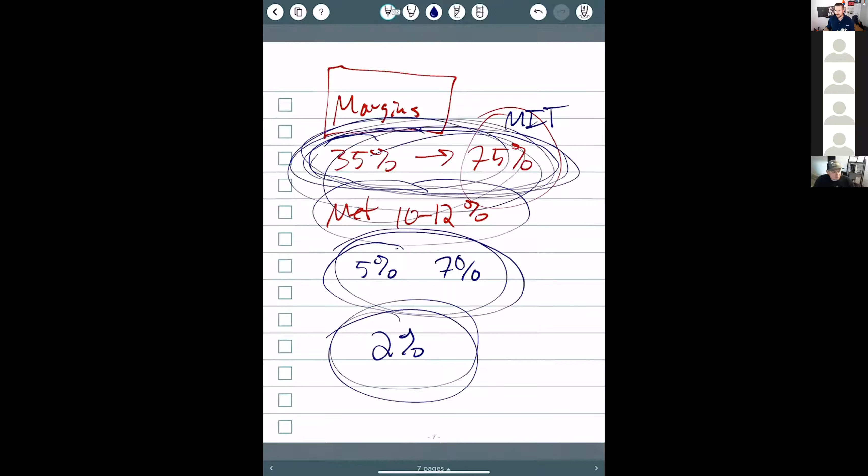Questions so far? If there's questions, raise your hands or put it in the chat. We're not there yet, I'm back up here.

So what I want you to get from this is this: Xactimate is not a sales tool. It's an estimating tool. We use Xactimate to estimate, quantify, and qualify the losses and the jobs we either just did or are about to do. It's not a sales tool, it's not a guarantee of anything. We just use it because that's what is commonly accepted and common practice in our industry. You absolutely can work in restoration and not know a thing about Xactimate—go time and material, make up your own billing system, because that's what we had before Xactimate took over anyway.

All right, any questions? Let me stop that. Any questions before I move forward?

No, no, no. Okay, get back here. Okay, let me back up a little bit.

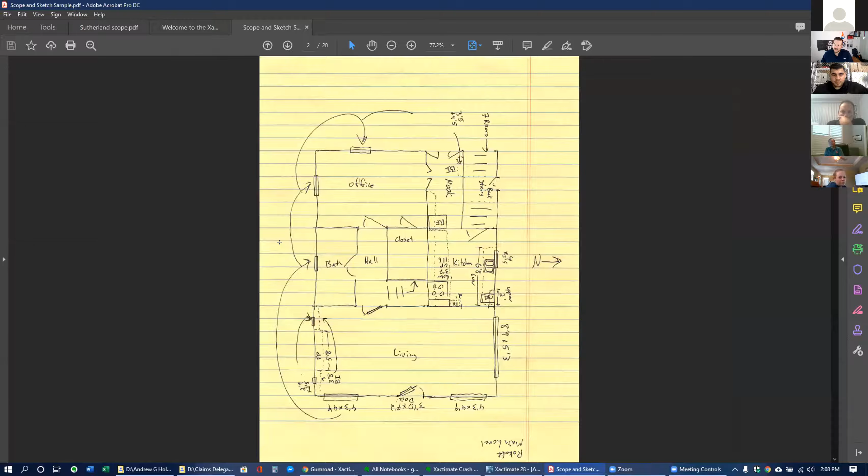Scoping, scope and sketch sample. Yes, let's share this. Oh, I lost my screen though. I'm just gonna share this whole screen. This right here is an actual loss I did in 2015. Some initial notes, and then there's my hand sketch done with a laser. Oh, it's upside down. It's all right, you get the picture of it.

You need at least this to do your Xactimate estimating. You've got to have a way to get the drawing. I'll go into why the sketch is so important in a second. And here is the repair scope notes, a sample of the scope note sheet that you guys should have in the resources by room. So that's what it used to look like.

Now it looks like, oh, get this up here.

It looks like Matterport.

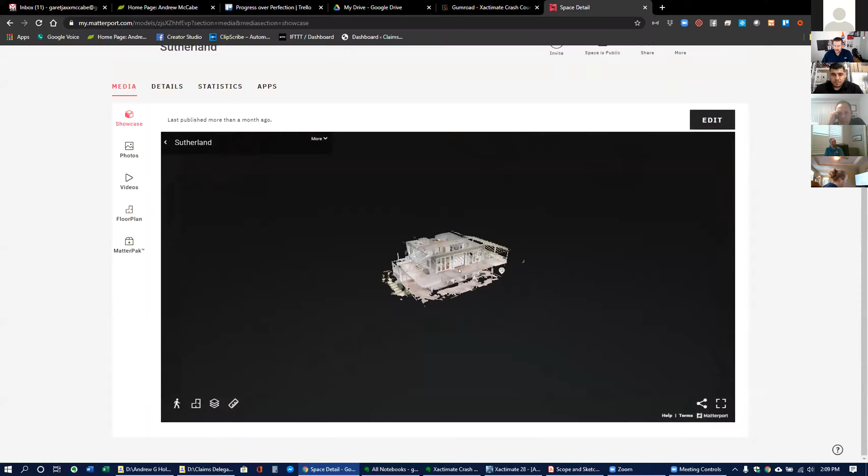Now the Sutherland job is the job we're going to do together as a class. I'm just going to come in here and do a little intro. Mr. Sutherland runs a big financial services company, and he has a very nice house on an island called Baker's Bay. But then Hurricane Dorian came and had her way with that entire island last year, and he had some pretty good damage.

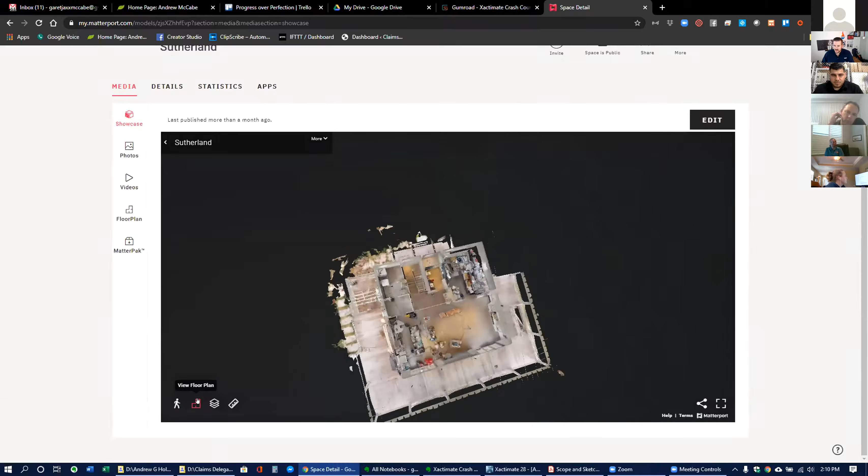But I'm able to take my scan that I did and turn it into a beautiful floor plan. Now, this is not the floor plan. The floor plan is... right there.

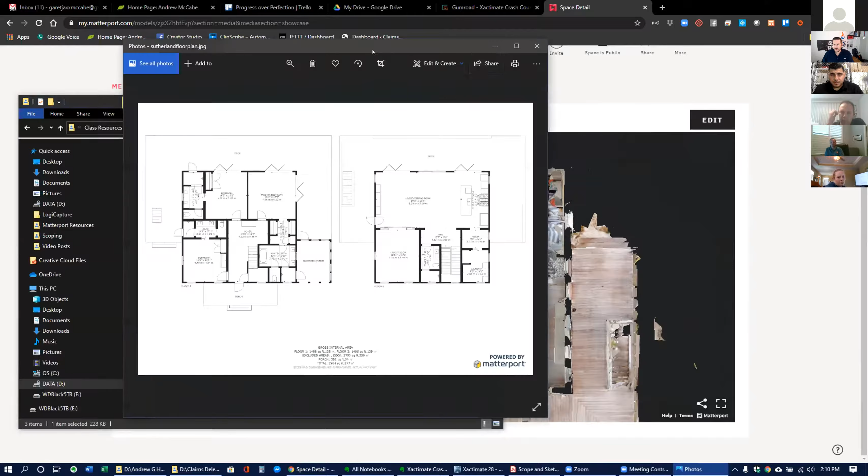So I didn't have to get a tape measure. I didn't have to write anything down on my pad. I let Matterport do everything. And the reason I did that, not only did it save me a lot of time doing this, but it also saved me time having to go back to this place to find items that I missed. Because until I decide to delete this file, I can go back to this house in the Bahamas and look at it. I can even come in here—this is not an advertisement for Xactimate, don't get me wrong. I'm sorry, Matterport.

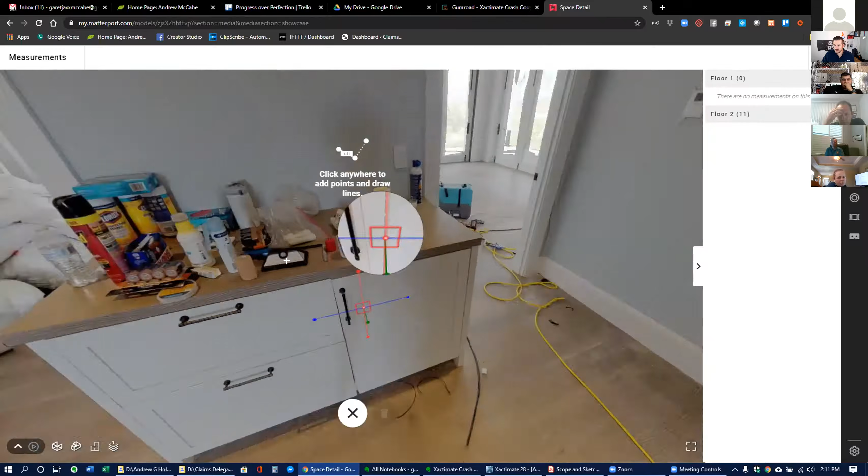But I can even start measuring things. How wide is this? Let me move over here—doesn't always work the best. Let me get a little perspective on it. How long is this cabinet? Well, let's go here, go there—4'10". I would say it's probably 5 feet. How tall are these doors? 8'1". Okay, they're about 8 foot.

I have a good friend, David Herring, out of Florida, who is fond of saying no file goes to court when there's a Matterport involved. The reason is because this is 100% unadulterated, irrefutable evidence. So alright, let me come back.

Documentation, measuring, scoping—okay, so we got our measurements. Oh, that's the other thing I didn't show you about the Sutherland house. I got my exterior scope, or exterior measurements, done with a program called Drone Deploy. Now, where's that file?

And Drone Deploy gave me this beautiful report. There's some of the pictures it took—that's a picture the drone actually took autonomously. That's me right there. I launched the drone, hit a button, let go of the controls, and it went through. I just drew a big picture around this whole property, and it measured 3 buildings for me into a nice report like that.

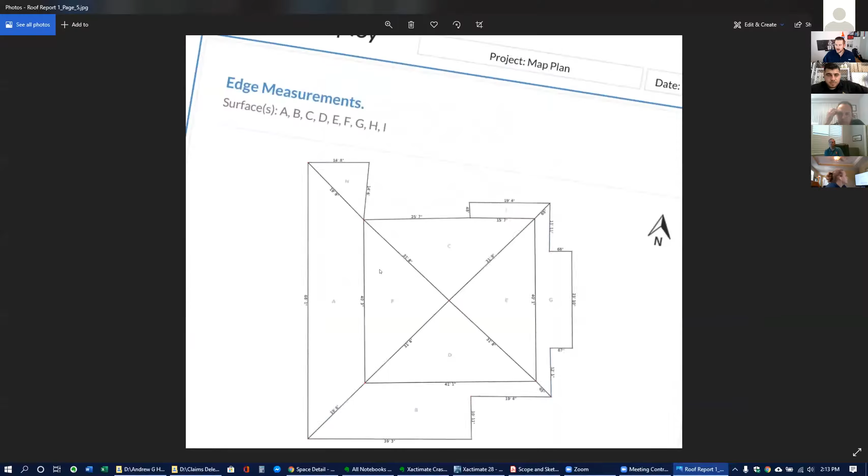What I don't like about Drone Deploy is it doesn't give me an ESX file. I've got to take this and scan it in, which I'll show you guys how to do an underlay here. I'm not going to do it on this roof, but I'm really excited about part of the resources you should have in your class resources.

Roofshots.com—they are about to launch an app that uses drones to do your own takeoffs. But until you get a drone, you can still use roofshots.com and get the cheapest roof takeoffs in the industry, like half of what EagleView is. So go through that when you get a chance.

This is the standard report, but you can say, hey, give me this in Xactimate. And I think it's for $25 or another $35, you can get it in Xactimate. When I'm charging my client $145 an hour, $35 is well worth the time. I'd invite you to ask yourself: what is your time worth? Can I pay someone to get this roof in Xactimate so I don't have to sketch it, and save myself an hour for $35? It's a no-brainer if you ask me.

Who here is—okay, let's back up. Stanley Fatmax. Yes, sir, Caleb. I've still got one, I still got one of those.

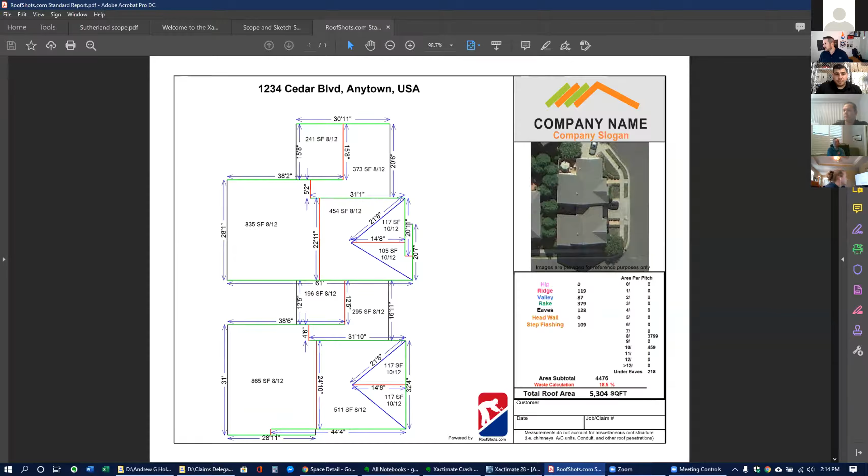What is the related cost for this Matterport? You mean the whole enchilada, all in? Is that what you mean? And don't be shy to ask questions, guys. We're gonna get to everybody.

Okay, well this here plus this tripod plus this case—which if you're hauling it anywhere, you want one with a handle and wheels for sure. I think the camera itself was $3,200, so we're about $5,000 in, all in, probably a little less than that. But then you've got, I think it's $45—someone correct me if I'm wrong—every time you upload and process a space, you pay for that. And every time you download a floor plan, you pay for that.

And they have what's called a TruePlan product, which will give you the full Xactimate starting at $250. So depending on the complication level of the job, oftentimes I will scan it and do my own floor plan, and underlay that floor plan in Xactimate and do my tracing—I'll show you all how to do that if you don't know. I will do that because I know it'll take me 20 minutes to sketch it. I don't want to pay them $250.

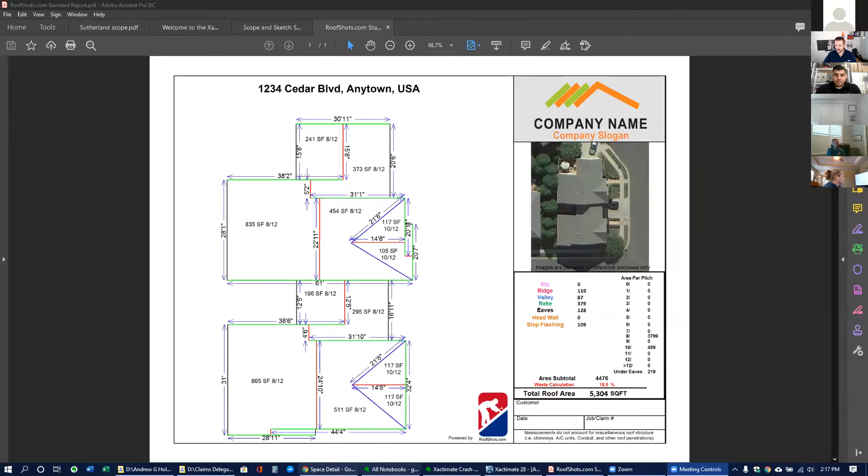And if any of you, come on, where are you at? Yeah, that's the one. This room is about 125 feet across. Am I sharing my screen? No, I'm not, am I? Let me try this again.

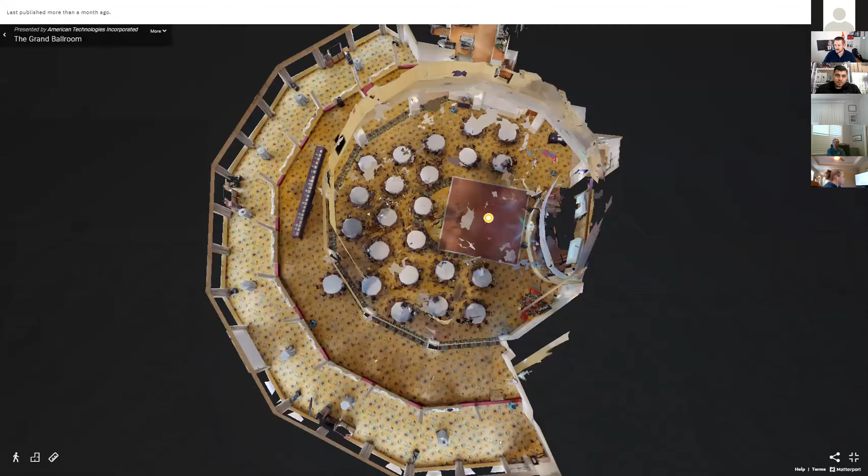This room is 125 feet across, close to 20-foot ceilings, with six different areas. How long do you think it would have taken you to sketch this in Xactimate?

Let's do a pan around while you're answering that question. Wait, Beth, you've got a Matterport on a dolly? That's innovative, I like it.

Okay, oh yes, the lights. Yeah, Michael Jones, you've got to get, yeah, and where's my lights at? Oh, I don't have them. Okay, so first things first.

Let's Matterport this scan. I figure this would have taken me a week, start to finish, Monday to Friday, between initial inspection, sketching by hand, and then trying to get this thing picture perfect in Xactimate. I think it would have taken a week, very, very long time.

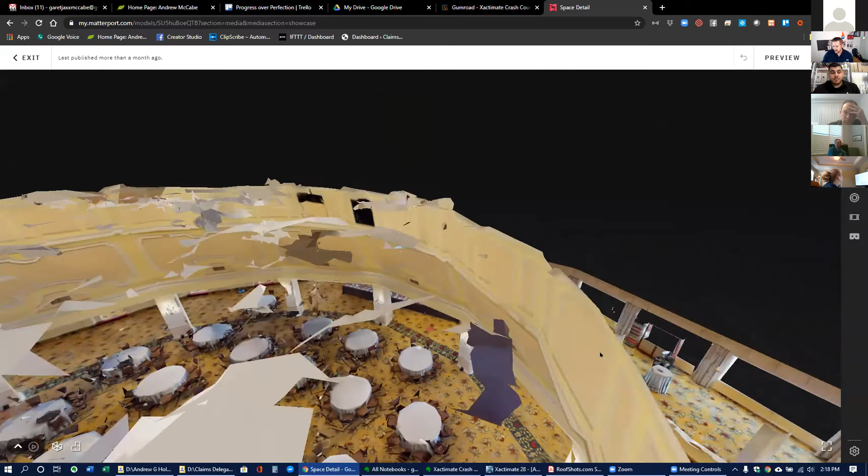I paid Matterport $750, which may sound like a lot, but this thing came back into Xactimate picture perfect, down to the fact that these little pony walls were in there, these columns were in there, these windows, the facets on this roof. It was the best $750 I ever spent.

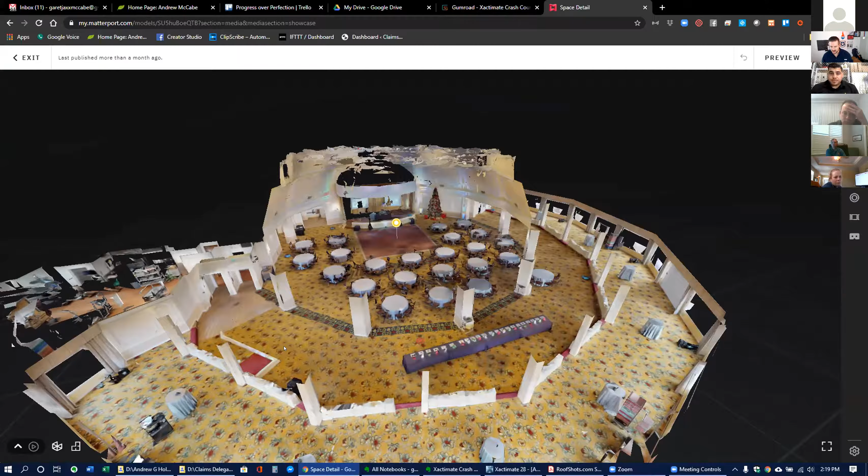Mainly because this was close to a $50 million project all in, and it was obviously not the only place in this hotel that was affected. When you're spending even $1 million on a project, $750 to get it scanned and in Xactimate, that's just pennies on the dollar, in my opinion.

Lights. This is the extra battery to my light, but I've got Velcro. This will get you the idea what I do for lights. It's a Milwaukee rechargeable flashlight thingy with Velcro on it. I just don't have the actual one. Yeah, the lights, the tripod, the everything else.

I highly recommend an iPad Pro. No matter what you're running, a drone or a Matterport, iPad Pro just has the horsepower and the memory. Hey, Andy, this is the tripod, the wheels.

Look at that. Oh wait, oh come back here, I'm gonna make you. Oh, I can't, I can't even center on you. Okay, everyone, look at Beth.

This is the company, Dolica. How much was it? How does the Matterport sit on top of that? So I'll just show you this one leg here. See this? You open it up, you put the leg in there, you screw it down. That's not the tripod, that's the wheel. The tripod fits into this, and then you just wheel it around instead of picking it up. Then you lock the wheels down, obviously, to keep it still.

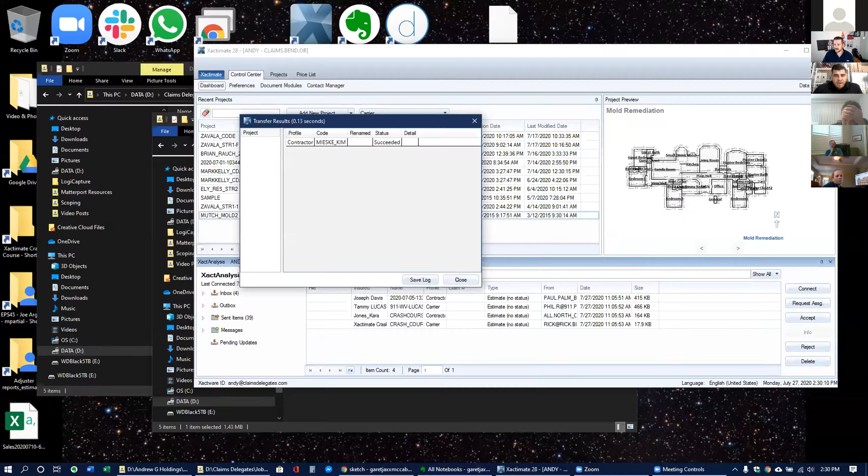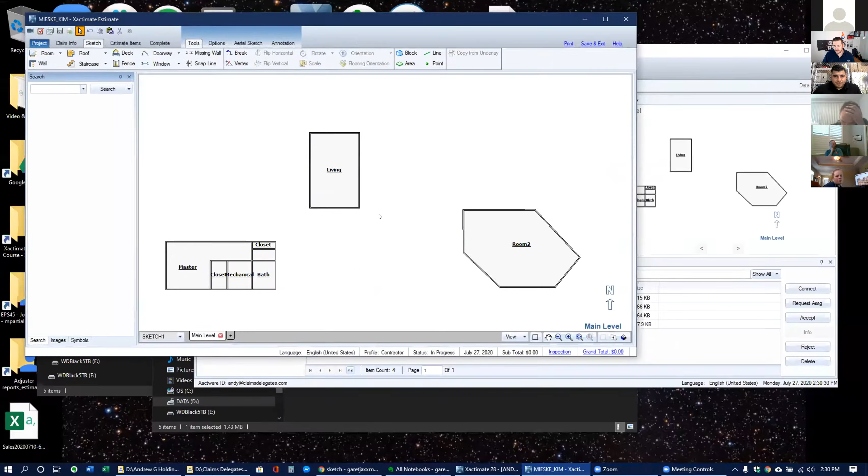So let's see how he did. We'll go ahead and continue without a price list. Oh, whoops, let's continue without a price list. How did he do? Oof. Well, that's what you call an old college try. So you can see he was trying to get there, just couldn't quite do it, but he did send me some pictures that look like this.

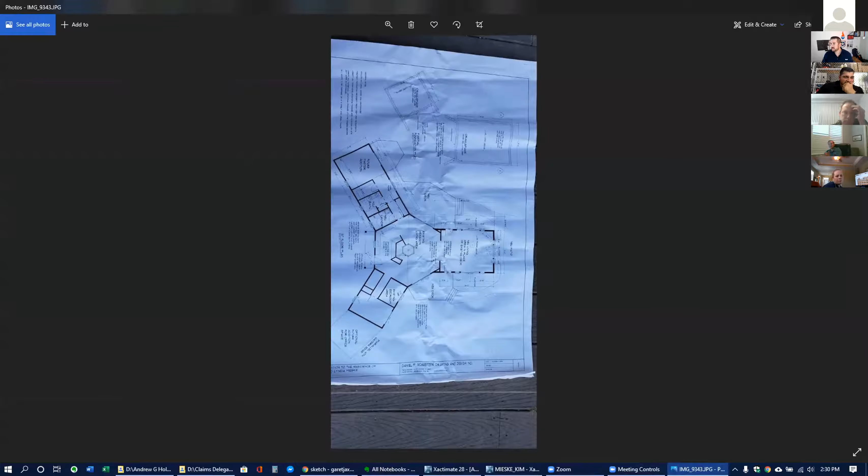We're going to come in here to sketch. We're going to go to options, we're going to import underlay image. And now let's go find it. Which one was it? 9343. Let's see if that's good enough.

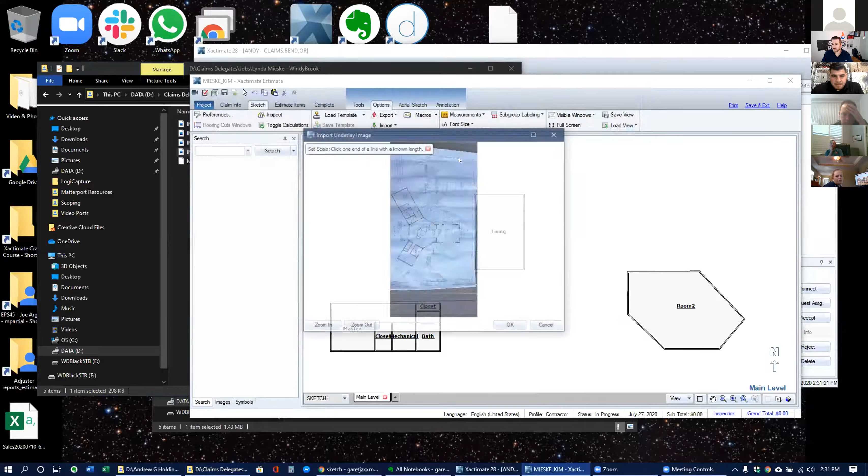Expand it as big as possible, zoom in as far as you can. This function here, oh, it's a crappy one, but I think we can still do it. I can't even read those numbers, but he did tell me that this room here was 16 feet on a side. So here we are.

The first thing Xactimate asks you to do when you import an underlay image is set the scale. So I'm going to put a line there, and a line as close as I can there, and I'm going to set that at 16 feet. Boom, hit OK.

Oh, let's move this, move that out of the way. Oh, come here, see ya. You can select all that. I just draw a box around it, select it, move it with the handle.

Okay, so here is the living room. I wish I would have flipped that before I did this, but it doesn't matter because we can always flip the room when we're done. So I'm going to hit R for room, and I'm just going to line this up the best I can. There's that, I'm going to take this all the way to the corner. It's not a perfect drawing because you can see it's not exactly straight, but it doesn't have to be. Don't get caught up in your sketches if it's not perfectly straight, because I would be hard pressed to find any adjuster that could actually do this.

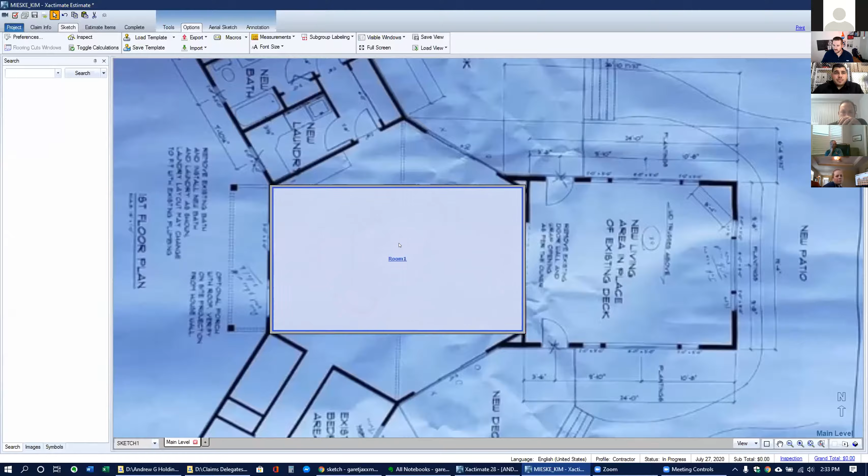So let's double check our work. 16 to 1, pretty damn close. All right, so you see how we set the scale of the drawing, and every room we trace over the top of it is automatically set. I'm going to use the V here, vertex tool, put it roughly in the middle, and then pull that up. Now, it won't let me do that, but I hold down Shift, and it lets me do that. I'm just grabbing the tool and tracing it up. All right, hit V again, get my vertex roughly in the middle, hold down Shift, and grab that sucker.

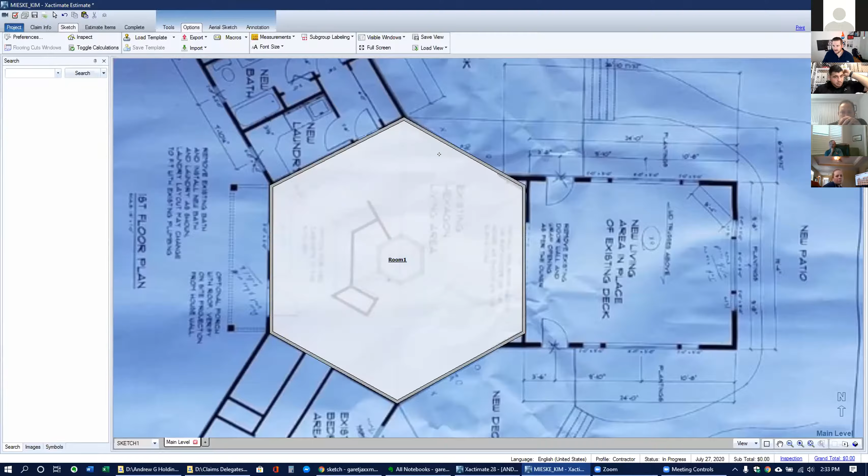Boom. And that is pretty darn close. If I want to get really technical with it, I can select this whole thing, come up here, and rotate, free rotate, and get it a little bit more perfect.

Oh, I got to hold Shift again. Hold Shift again. There. All right. Everybody catch that?

You know what's sad? Our industry is so competitive with itself that oftentimes we have people who know stuff but refuse to teach anyone else because they're afraid they'll know more. I learned that tool from a guy I was working with, one of three different teams in the company. He was great at Xactimate, and I asked him how to do this. He's the one who taught me how to do an underlay, but he didn't teach me the shift trick. I had to find that out somewhere else. When I did, I went back to him and said, hey, why didn't you tell me? You know what he said? He said, well, I can't give you all my secrets, which is horseshit.

All right, we're in this together, let's share. So yeah, the shift button, you can do any angle. I'm gonna do a Control Z because if you have things at a weird angle, it's gonna mess up the rest of your sketch. But we can start going from here.

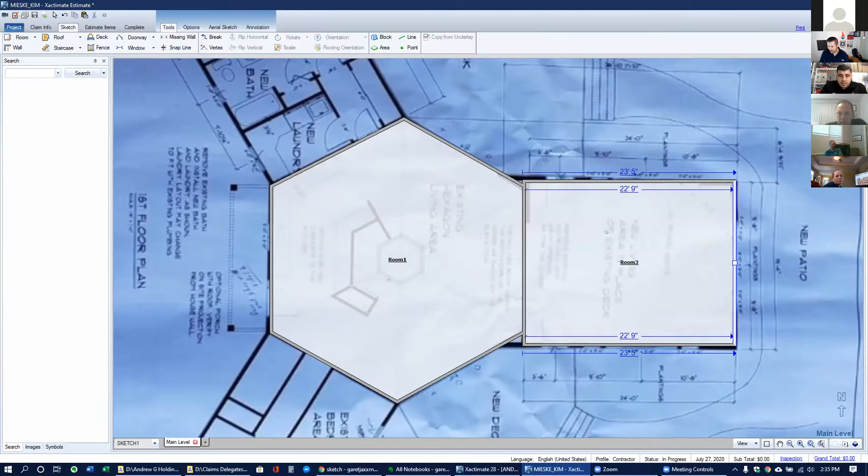So there's a B as your break tool. I'm going to put a break in here about 4 foot, imagine that there's a 4 foot kick out here. But then the angles, if you don't like the angle it defaults to, this only has a couple different options. You just hold down Shift and put that thing anywhere you want. Just like that.

Okay, how much time we got? I've got a little bit of time. All right, let's keep going.

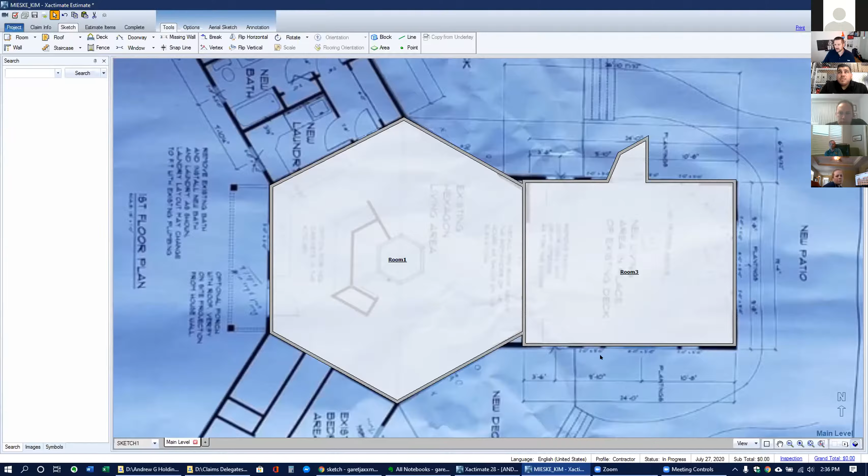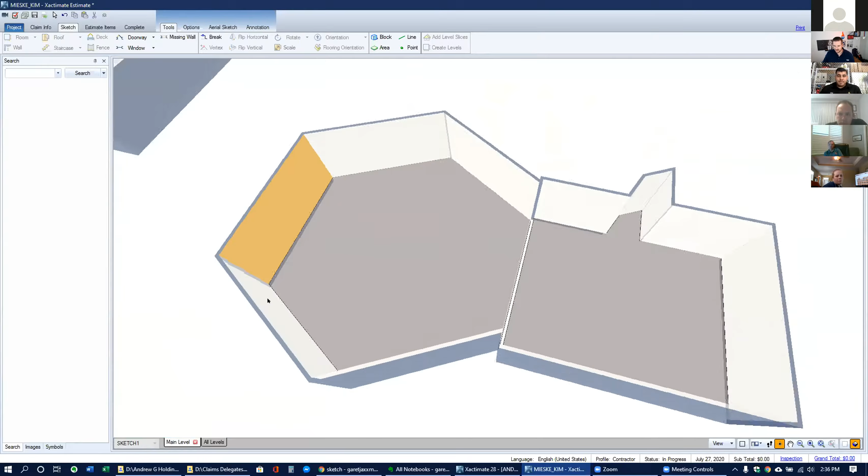Why is it important to get a sketch done? Because I don't want to have to measure every single surface in this place. I'm lazy. On mitigation, if we flood cut this wall, or half this room, I could just measure that with a tape measure and find out what it is. But with the magic of Xactimate, what did we name that room, by the way?

Oops, go back here. Room 1. Okay, let's call it hex because we can. Okay, I got to slow down. I double clicked and it came up with the room properties. I changed the name. This is also where you change the room height, the ceiling height, the ceiling type.

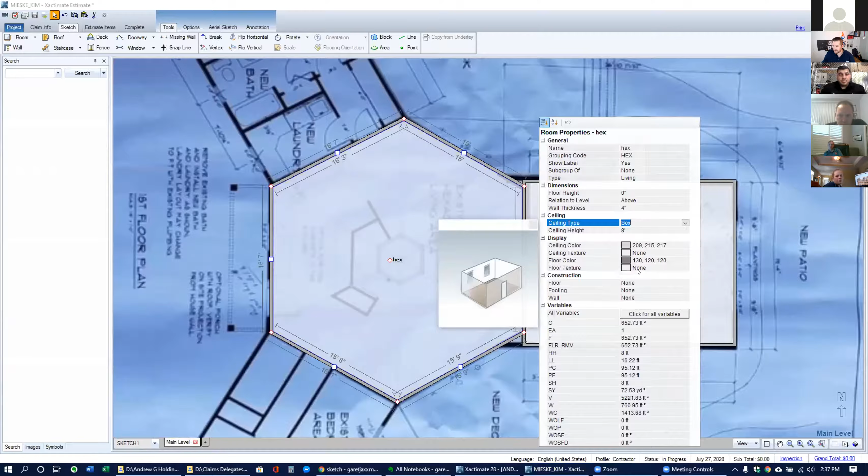Construction, we'll get into this on Wednesday, but if I wanted to automatically do the framing in this room, I just pull down this wall and it's framed. And what you'll see here, once I did that...

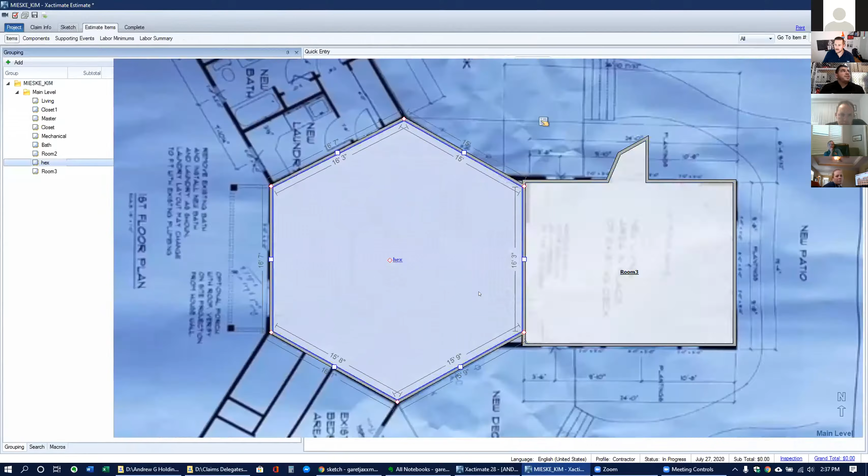Framed. All right, I take no responsibility for what Tim did to this estimate before I got it. How about that? It should have all my framing stuff in here. Okay, that's probably a bad example because it just is.

Let's come into my sample project. Actually, let's do one better. I'm gonna pull over some of your guys' projects you sent me. It looks like I got 1, 2, 3, 4.

So what I do is click the first one and hold down shift. Oh, another one just came through, look at that, boom. Hold down shift and click the last one, that selects them all. And I go ahead and accept those things.

And they may come up in here, they should come up in here. If they don't come up in here, they come up in Projects. Your project window shows all your projects. When you're in here, make sure this button is clicked, show all. I gave myself fits not realizing that one of these was show current user. Well, if I didn't make it and I'm showing current user, these other things are not going to show up. So always show all, I don't see any good reason not to.

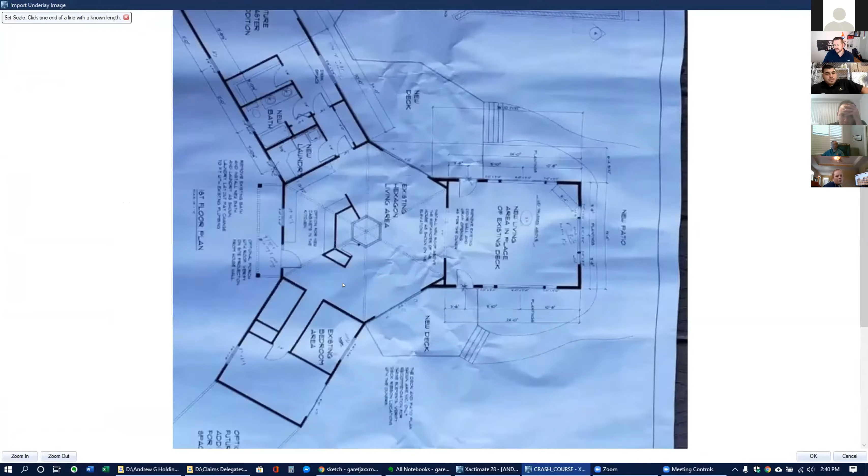Import, underlay. Let's try, yeah, I guess let's do this one. This window always comes up small. I like to expand it and then use my mouse wheel to zoom in, and then set my scale.

Ish, 16 feet. Hit OK, and there it is. I zoom in again. I'm not gonna make the hexagon room.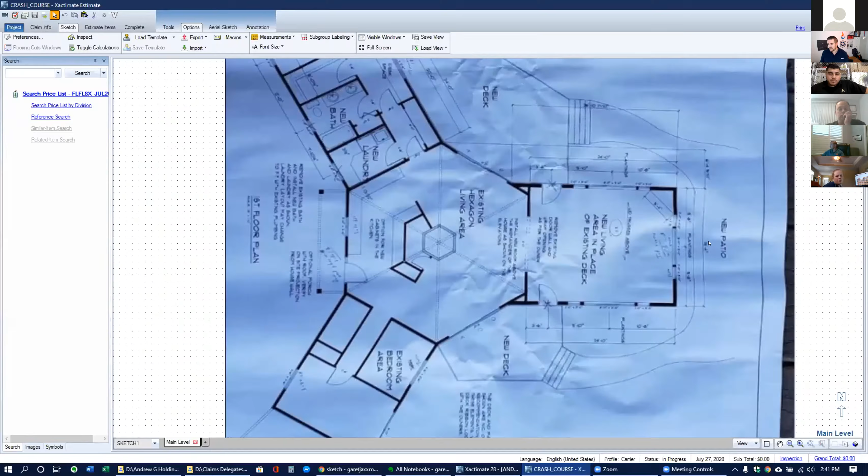When you lay a room, tab will rotate it for you. Tab will rotate everything for you when you're placing it.

So that's close-ish, so I'm gonna set it. I'm gonna come back up here to rotate it. Free rotate and hold down shift, and let's get that sucker closer.

Anyway, it'll take some time for a few times. It's not perfect, and I'm not gonna go for perfect today, but then I just start adding my rooms.

Oh, that's a problem. Okay. Well, that would take too much time, so I'm not gonna do it today. You just use your shift button right there.

Say what? Could you apply that shift button right there to rotate it a little bit easier to get it to square up? I wonder. Let's go, shift tab.

No. Well, we can rotate it, but then it's got to be perfect before Xactimate will let you line it up.

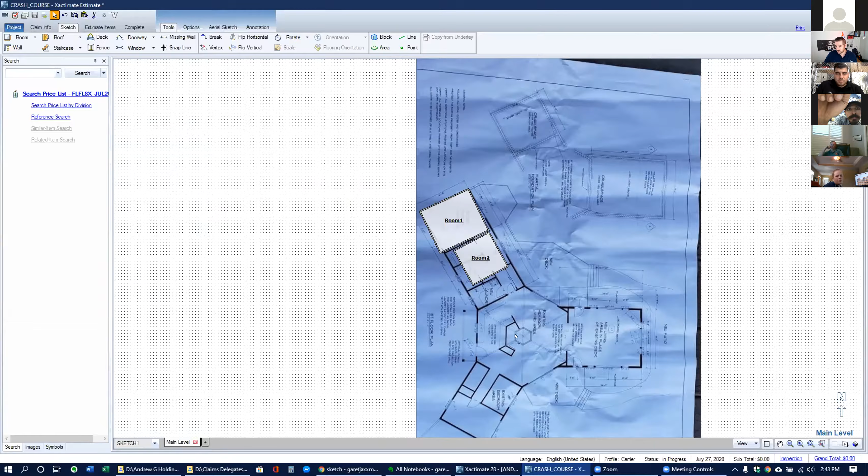All right, this house is going to give this guy fits because here's what I would do. I would copy this photo 3 different times and make sure the photo is straight before you bring it in. But okay, let's keep moving.

Room number 1, I want to put in framing. Control key. All right, what do you think? What are you thinking, Paul?

Whoa, what the? Yeah, it's not working. Just hold the control key down, drag out the room on room 1. Drag? Hold the control key down and drag the bottom.

Yeah, right there, yeah. Oh well, you can, oh, I think you need to use Control Shift. There you go, there we go. Okay, yep, all right, I like it.

So assuming this is lined up properly, hold control and I grab this wall and I have another room. So if I do a break right here,

Break. And then I want to make, let's break this, let's take that break all the way back. Let's break it here.

Oh fine, let's get the hallway in here. Oh whoops. So hallway, we can do the control again, right? Control. Ooh, I like it. I like it.

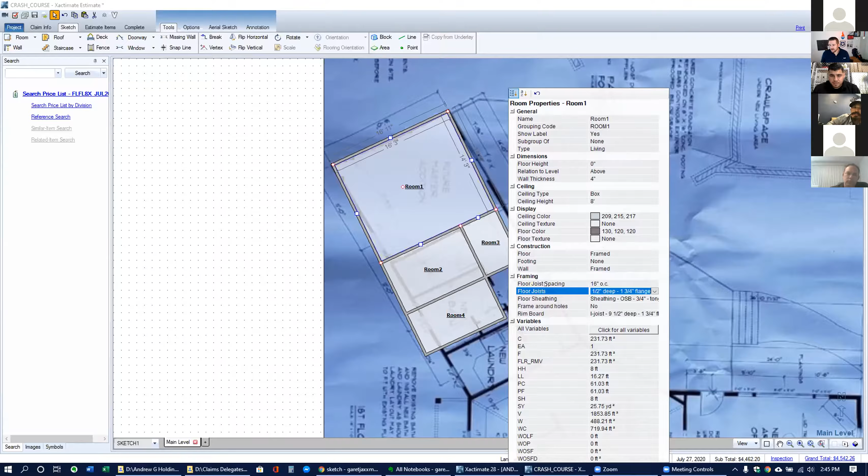Okay, well, Xactimate will estimate that for us, and we come back over here and all those framing items are in here already. I don't know why it's not doing the walls correctly today. It just doesn't like me today.

But in that room, room number 1, what if I just wanted to pick out half the walls? All right, we're coming up on 15 minutes. I think this is perfect.

Okay, let's just make up some items. We're gonna paint 2 coats, but we only want half the walls. Because I have it sketched, I'm able to take the walls, which is W, divide it by 2.

What if I wanted to do a 2-foot flood cut? What would that calculation be? Well, it'd be the perimeter of the floor by 2 feet, times 2. And hit OK. So let's look at what those variables look like.

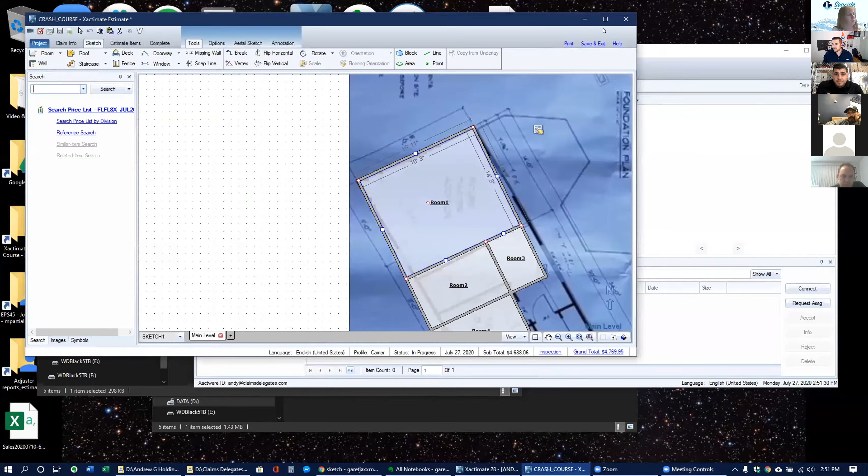So we have our sketch. Here's our beautiful sketch. But we want to know, let's assume this is the whole house, and we want to paint the exterior of this house or change the siding. We want siding, all right? We're going to do siding and house wrap on the exterior of this house. You can't do the exterior wall function inside any one room. We can come in here to room 1, and let's just do siding.

I don't know these very well, and we're going to get into this tomorrow. Let's do board and batten, cedar, why not? And if it'll let me do walls, that'll do all the walls on the inside of that room. But it will not let me do exterior walls. It should give me an error. Yeah, because when you're inside these rooms, Xactimate doesn't know what the exterior wall is.

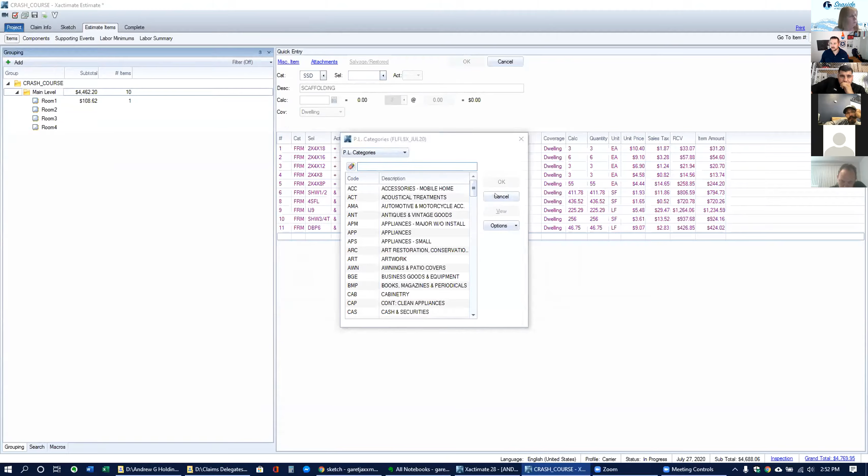But what's this? SDG BABC. I come up here to main level. I type in the same thing, SDG BAB, and I do EW. Comes up with the calculation already, 818 square foot. So as long as you're in the main level here, you can use the exterior wall function to give you that. And here, you can see this is room level calculations.

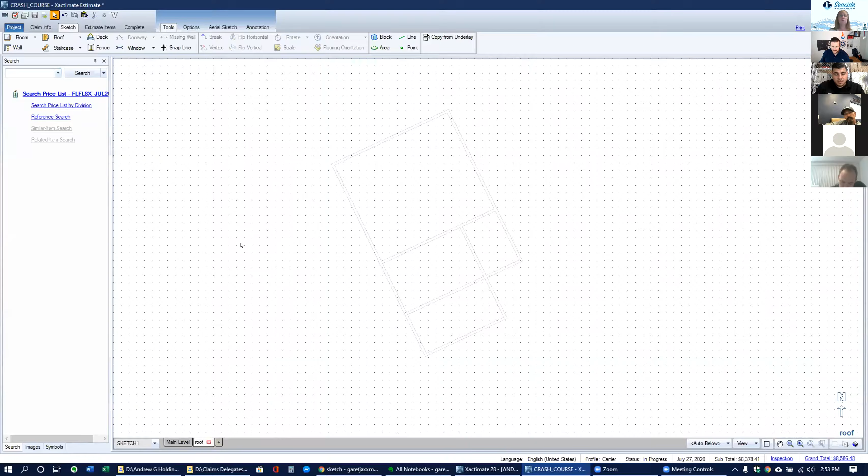This is level. Level means this. Level means this. And you can always add another level, right? This is the roof level. So as long as we're in this main level or the roof level, we can pull the aggregate, the level calculations. Let's come back in here.

What other stuff can we do on the level? Exterior walls, square feet of interior walls. So you separate those two items. Linear feet of exterior wall perimeter, that could come in all kinds of handy. Square feet of all floors. Okay, so this is where I do a lot of my stuff. If I'm just doing global stuff, I'll do it all in the main level and use this square feet of all floors here. Okay.

Yeah, I'm a huge fan of Evernote, Jordan, huge fan. I've got guys send me pictures of their hand sketches in Evernote, and I use that Evernote picture and bring it into Xactimate. Okay, what function applies? Other floor protection? Absolutely.

Floor protection, rolled goods. Not to get too deep, we're almost on time. I like to do rolled goods in Sketch. Let's put a door here. Let me just show you how I do rolled goods.

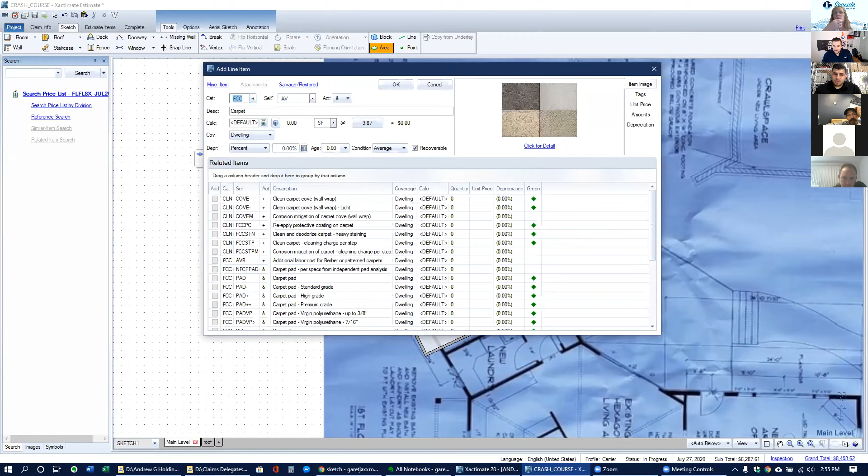Before I placed that carpet, I right-clicked and it brought up this window. What is in this window? What's in this window is everything that's related to that. Am I doing pad? Yeah, I guess I am doing pad. I'll click that. Let's do our water function.

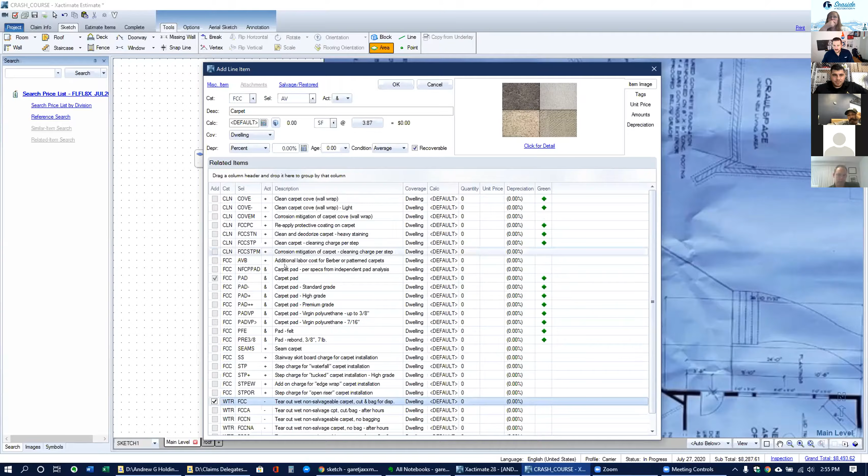Let's do our pulling it out function while we're here. Let's do that, and what you'll see once we click on here, let's just leave that, and then we just drop it. And we drop it. And that's it. We go back into our estimate.

We can see the carpet. It separates out the removal and the replacement of the carpet. But look at this calculation. This is a calculation you can type in if you don't want to go into the sketch function. So FLR underscore RPL, flooring replace. What this does is it figures in your flooring cuts. That's why this number, removal number, is 232 square feet, but the replacement number is 318 square feet.

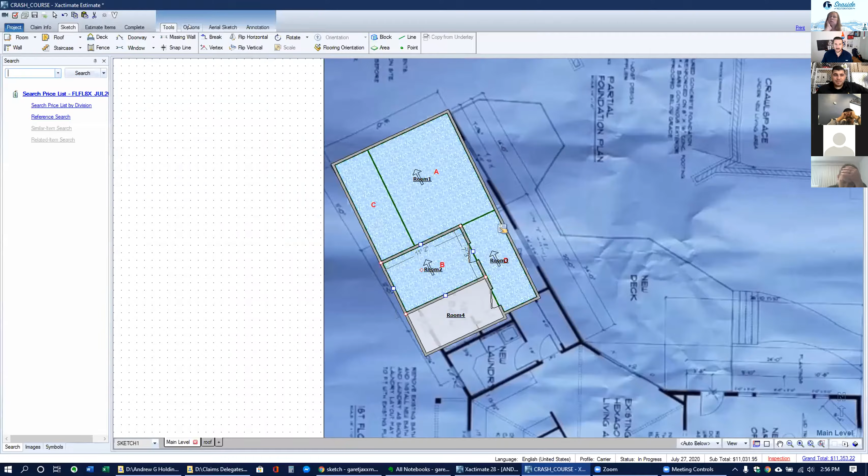If you're doing flooring at all, I invite you to go into your options, and go to preferences, and go to your flooring properties. You want to reduce, you want to put your maximum fill pieces at 1. I think the default is 4. What that does is it ends up cutting up your flooring, so you use less of the material, but you have way more seams. So get this down to a reasonable level.

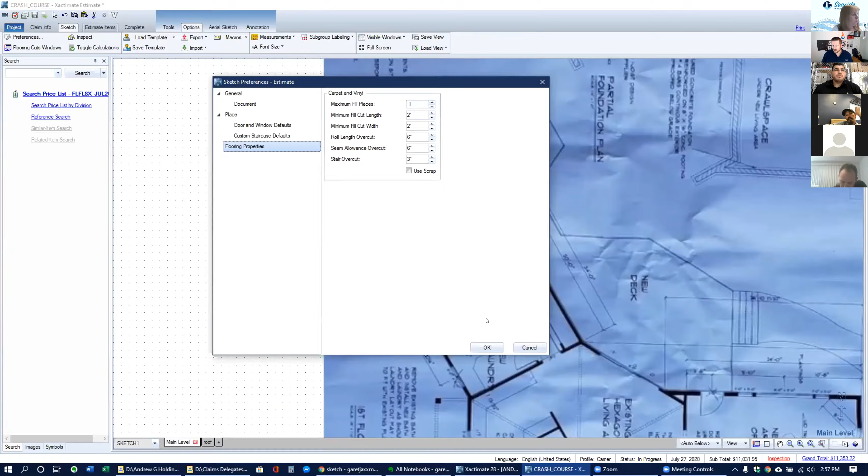That's, once again, I went into sketch, preferences, actually sketch options, preferences, and then flooring properties. Maximum fill pieces 1. So you can come in here and you can see your flooring cuts. There's 1 seam in there, no seams in those 2 rooms.

Perfect. What if we don't want to run the carpet that direction? We come in and we change the flooring orientation. Let's run it that direction, see where our cuts are. It makes an ugly cut in that hallway, but that's how you do that.

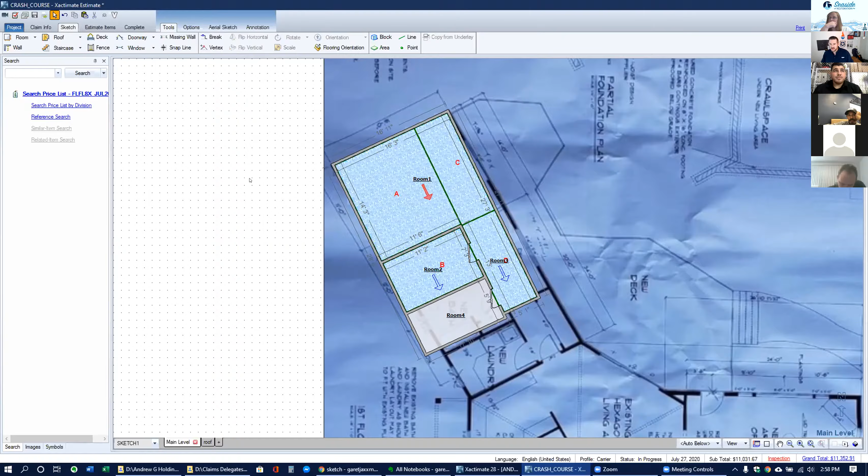I'm gonna move that back because it figures 12-foot goods. The machine figures out 12-foot goods, and as long as you're not reusing the waste, your calculation tells you you're gonna have the right number of material to order based on that. And I've gone round and round with adjusters on this.

Well, you have twice the flooring in that closet, twice the carpet in that closet than the actual square footage. And I said, yes, I do, but I got to buy all 12 feet of that roll. I can't just buy half of that. Then you can argue whether or not they should pay for all the additional labor, and I'll have that conversation all day. I am willing to give up labor on that, but I'm not willing to give up the material costs at all.

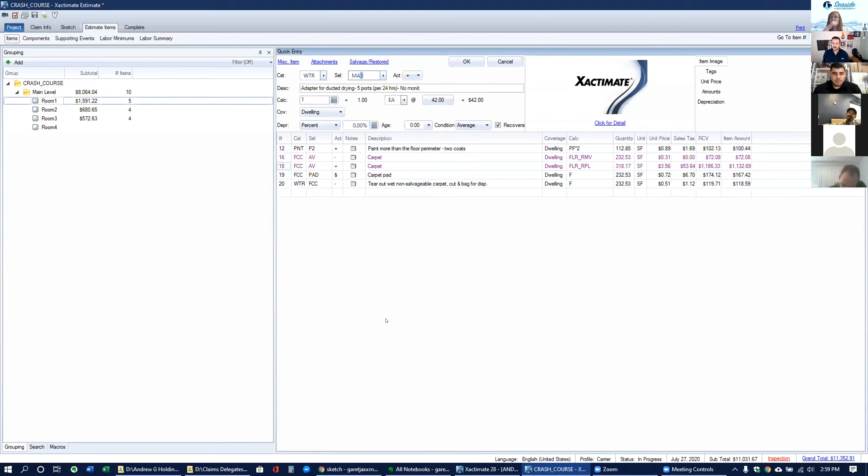Okay, so floor protection, same thing. Let's do floor protection in this room. Actually, I take that back. I don't know if Xactimate figures flooring protection by the flat goods. Let's see. It's self-adhesive. The regular floor is 232.

Okay, let's try this. FLR, RPL. No, does not work. Only rolled goods, only actual rolled flooring. Ron Brown, where were you? Okay, get in the room.

Let's open it up. We're at time now, but I want to make sure we have some time to answer some questions. Tomorrow we're going to get nitty-gritty. We're going to go a lot more granular, but it was important that we set the groundwork today and just kind of get the feel for it.

All right, so is anyone's brain melting yet? And grab my iced tea.

Really? You guys are professionals already? Okay, I get you. I see how you roll.

Yes, you will get the recording. Not today, probably not even next week. It's going to take me some time to edit it down to a digestible format, because we don't want all the ancillary stuff, we just want to go chunk by chunk. So it will be edited. It will be an actual course that I will sell, and you will have access to it for free.